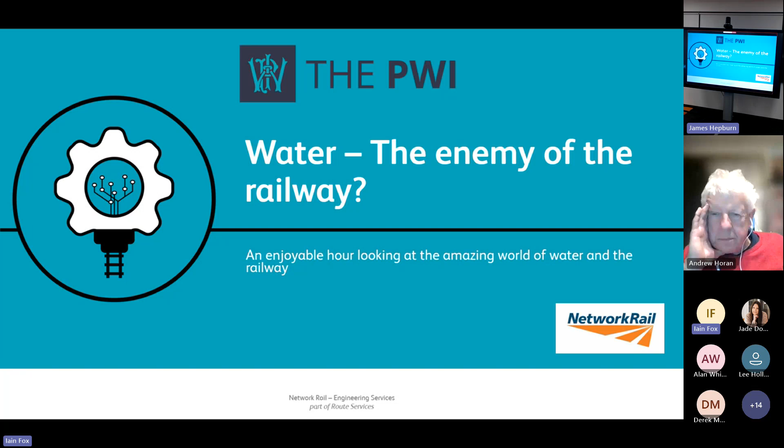I did a very similar talk to this for the ICE just before Christmas. I was asked to come down to see you guys here and give you a very similar presentation, looking at water and how it affects the railway. We know it's very prevalent in the news, we know climate change exists, so how and what is it that we're actually doing?

There is a plan for this evening, believe it or not, so this is it. We're going to have a look at the difference between a drainage engineer and a water engineer - that'll make itself clear in a sec. We'll have a very brief look at Network Rail management process. I don't want to put you all to sleep, so we won't do too much on that. We'll concentrate a little bit on what the issues are, so the main issues of climate change, the main issues of existing and aging infrastructure, and the issue of scour.

Bridges and structures - we'll have a look at what we have within Network Rail to try and fight this water. We do have a water management strategy. We'll have a quick look at hydraulic modelling, and we'll have a little look at catchment analysis as well. And then we'll finish off by having a look at some of the advancements that we are pushing to try and help us manage this problem.

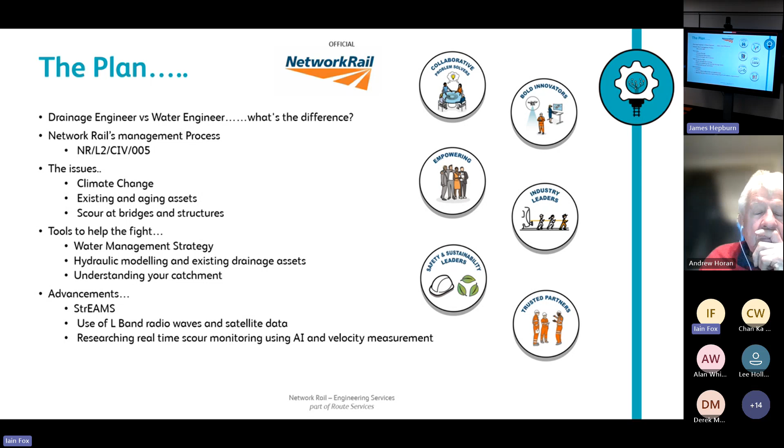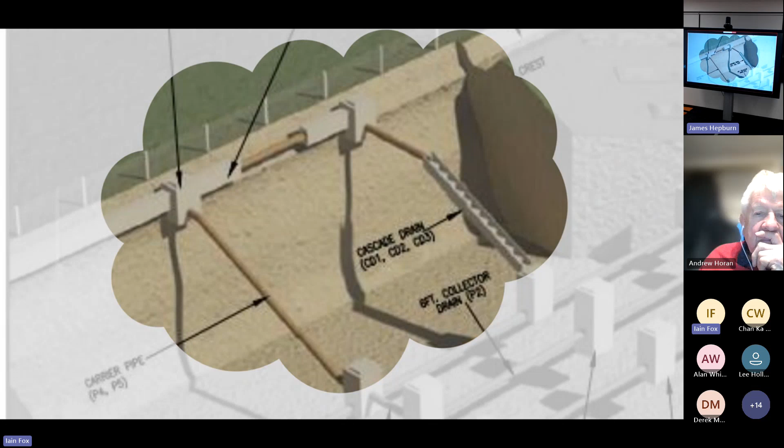So if I start by looking at drainage, and if I say I'm a drainage engineer, it brings up certain connotations in your brain about what my day-to-day job is. Most people think that we deal a little bit with some crest drainage. We have a look at some counterforts, we have a look at the cascades to bring the crest drainage down onto the track drainage, and you pretty much think that is my day-to-day job. That is a drainage engineer's job.

If I go into schools and colleges and ask them the same question, pretty much that's what we get as an answer. If I then open that up and say, okay, forget drainage engineering, I'm actually a water engineer - now what does that tell you that I do? What that tells you is, yes, we deal with track drainage, and we deal with catchment analysis, and we deal with the hydraulic modelling, and we look at third-party inflows, and surface runoff, and flood risk management, and river flooding, and tidal flooding, and scour.

You get the idea, and we also look at some research things. What do you do in the afternoons? The afternoons are just spent sleeping, really. But as a Network Rail drainage engineer, this is actually what we do, and there's a labelling problem between what you think we do and what we actually do.

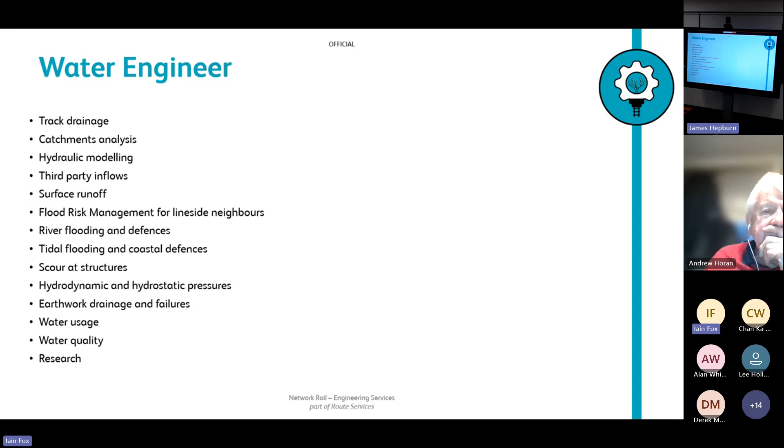Network Rail very kindly gave us this little graphic, which I'll make a bit bigger for you so you can see, kind of demonstrating the water use and problems around the railway. So if we just pick a few of them - yes, we operate drainage assets to take surface water from the railway corridor. How many people know that we actually are responsible for managing water quality off the railway? We can't pass forward contaminated water. We have legal responsibilities around discharge. We manage coastal defences - Network Rail have got several assets that are classed as coastal defences, and those defences don't just manage the railway, those are coastal defences for properties, towns, villages, and beyond.

We use water, obviously, for dust suppression, cleaning trains, things like that in the depots. We dewater tunnels. We use potable water in the stations. We prevent scour. We manage flood risk. All of these things go on to my desk and my day-to-day job as a drainage engineer for Network Rail. Does that come as a surprise to anybody about the scale of what it is that we do, or am I preaching to the converted?

Silence. Brilliant. I love a bit of interaction.

Okay, we'll move on. I think a lot of things have become much more, if you like, the traditional view of the drainage engineer in managing drains. The environmental issues and climate change have made it much more than that in recent times.

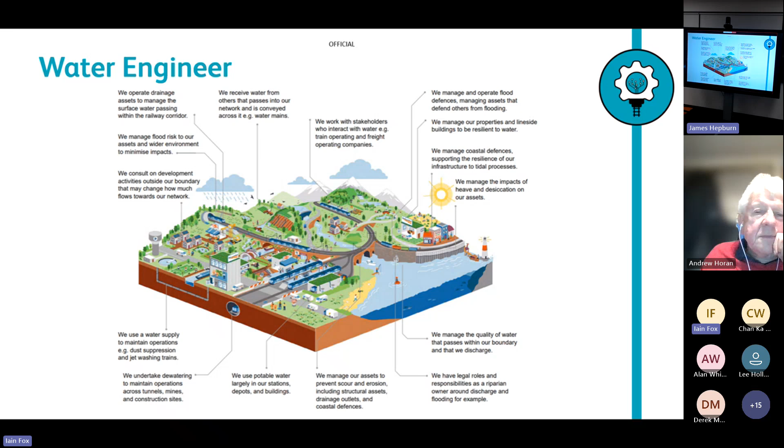And when we come on to look at catchment analysis and problems, we'll touch on climate change to get a bit of an understanding of it. It is getting more difficult to defend our position with coastal assets, protecting the communities. It's not solely for supporting the railway, but that's becoming more and more difficult to defend.

It is, and it's an argument with NRW. It's an argument with the EA here in England, SEPA in Scotland, that all the routes and regions are having about maintaining these flood defences as flood defences and not just as a railway, because there's a huge cost implication in defending or keeping them as flood defences and not just keeping them as a railway.

Because we're not a coastal protection authority, are we? No, but we do manage coastal defences. There are quite a few, actually, quite a lot of them in Wales that don't get into trouble. You've got a few, yeah.

So as Network Rail, yes, we've got a management process. We've got one for everything at the moment. The drainage one happens to be CIV 005.

It looks at all of those things. So it looks at things like how do we evaluate a drainage system? If we know a drainage system is in the ground, how do we evaluate that? How do we describe the assets? How do we look at management plans?

How do we inspect a railway system? How do we maintain it? How do we design it? How do we install it? All of Civil 5 covers all of these things.

The reason, as far as I'm aware, that Network Rail take this stuff very seriously is this.

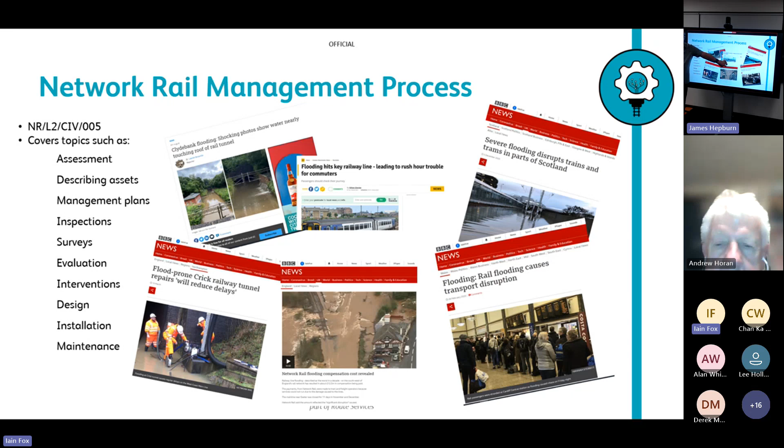Doesn't happen. So this standard tries to prevent these. Whether it works, well, we're working on it.

So climate change is one of the biggest challenges that I think we all understand is happening. It is getting wetter, it's getting warmer, the river levels are getting higher, the velocities in the rivers are getting more.

The amount of water, the volume of water coming down there is huge. If you look at the Environment Agency, Natural Resources Wales and SEPA, they all have estimates on 2050 and 2080 river levels.

And some of those are adding 100% extra flow to what you have now. So if you've got a river, it's going to double under normal conditions by 2080 in some of the predicted models. Wintertime flows, so it's a year-round flood model.

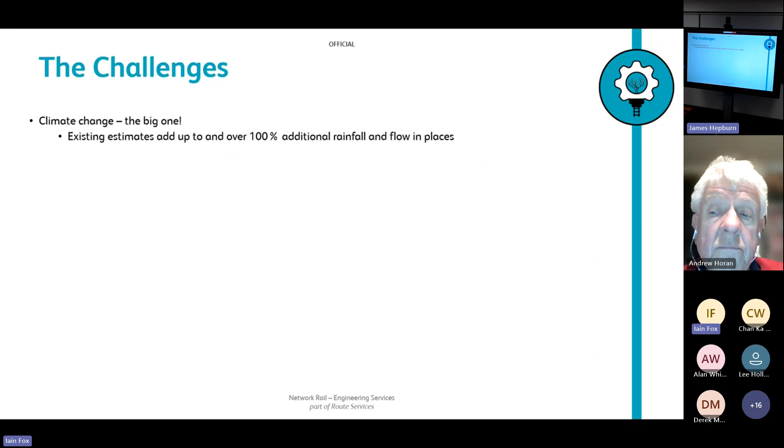Yeah, so the flood is going to get a lot more because the rainfall gets heavier, the catchment drops all that rainfall into the river, and that response is over 100% in some areas. I've seen 124% in one area in Cumbria, which is enormous.

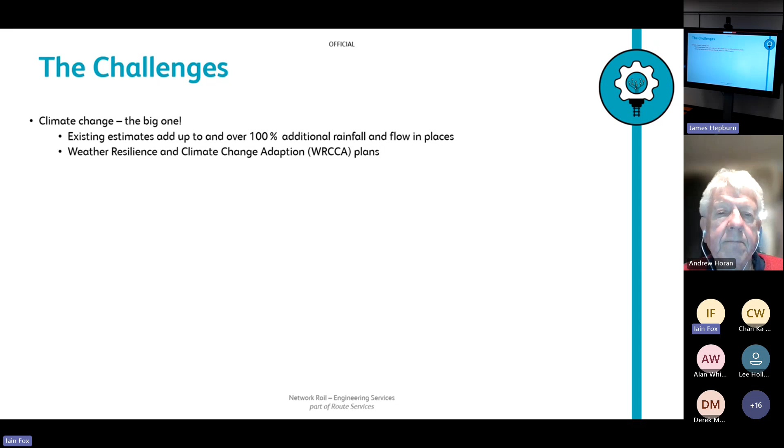Does that take account of 1.5 million new homes before the end of this government? No, doesn't account for those. Again, obviously, one of the use cases is you put more homes on, you get much faster runoff, and it changes the response time of the catchment.

It doesn't change the volume of water, it changes the response time of the catchment, so the water gets to you faster than it does now.

What I call flash flooding. Flooding risk, absolutely. Dry ground that doesn't infiltrate water perches on top before it gets a chance to infiltrate into the ground. So you've already got increased water, and with saturated ground it does exactly the same thing - the water's got nowhere to go. This is Wales, the ground is saturated all the time, so as soon as it's saturated, water just goes straight off the top.

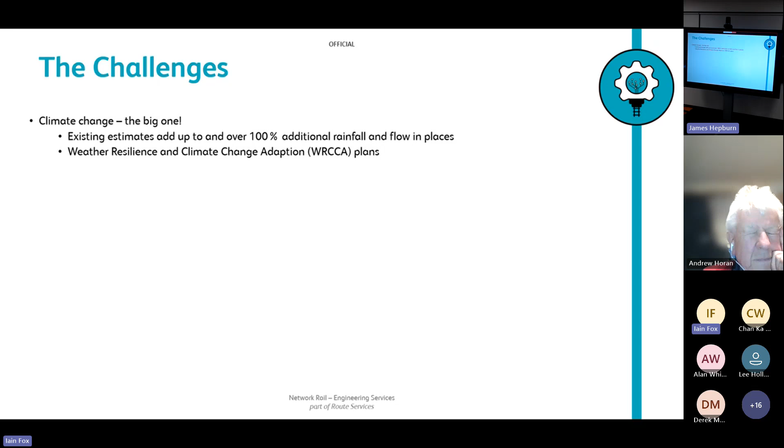As Network Rail, we do have a weather resilience climate change adaptation strategy. If anybody is bored enough, feel free to scan that QR code and it will download the entire plan to your mobile device. It's a brilliant document to get you to sleep at night - there's a lot of it. I'll come onto that in a second. The next slide has some key points from it, so I won't make you read it all.

Here's an interesting stat. When we're looking at climate change, I know we're talking about flooding, but just have a look at this one - heat plays a part too. During July 2022 there was a big heat wave in England, and it reduced train performance by about 40%. The way it does that is a lot of these power supply buildings overheat, the transformers overheat - they're a big tin shed, and when the sun beats on them, things just pop. If you don't get air conditioning units inside those PSPs, things will go pop. We couldn't get enough in, and in July '22 we dropped performance by 40%, which in one week caused a £30 million loss of revenue for the railway system.

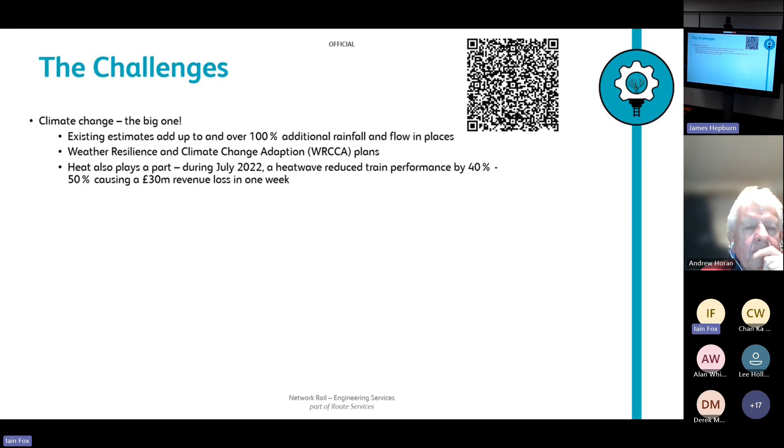That's a lot of money, an awful lot of money for heat. Can you imagine what flooding is? Big numbers.

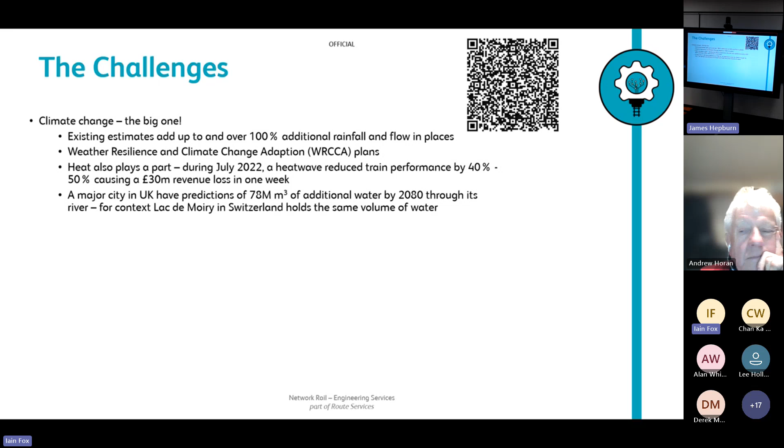This is an interesting one - I'm not telling you where, but there's a major city in the UK that predicts one of its rivers is going to have about 78 million cubic metres of water additional to now by 2080. For context, a 1.5 mile long, 120 metre deep lake holds 78 million cubic metres of water. That's additional to what that city gets now by 2080.

Where is that water going to go? How do we deal with that? I haven't got the answer, by the way - I haven't got a clue. That is an awful lot of water for one city in one part of the UK, by 2080, if the predictions go the way they're going. It's an awful lot of water.

There's a calculation done that if you look at Ullswater in the Lake District, which is about 8.5 miles long, it would have to be about 10 metres deeper than it is now to accommodate that water. A vast amount of water - difficult to picture.

Yes, we've got lots of aging assets and infrastructure - around 90% are as they were when installed about 20 years ago. Some structures Brunel built, from the 1800s to the 1850s, 1860s - a lot of structures are actually more than 150, 200 years old. They weren't designed for the amount of water coming down the channel now, let alone in 20, 30, 40, 50 years' time. How do we solve that problem?

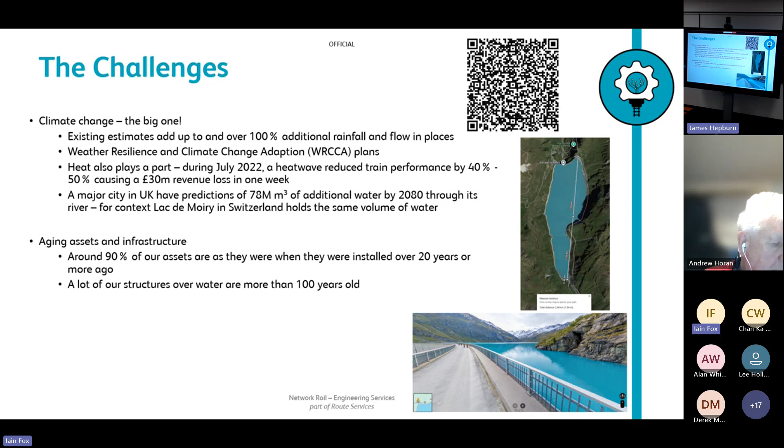And drainage assets - most of the drainage on the railway was probably installed 10, 20 years ago, and some would argue it hasn't been touched since we put it in the ground. However, if you do a hydraulic model now based on drainage that was put in the ground 10 years ago, it will fail - it hasn't got the right diameter to take the additional flow. As we were talking earlier about housing estates, that's where this comes in. If you've got houses built around the railway - people build either around a railway or around a river, that's where people build - all of that runoff gets to the drainage system a lot faster than it used to, which causes your pipes to be full, which causes surcharge at the top, which causes flooding on the track.

Quick look at scour. Scour is the largest single cause of structure failure. For those who don't know, scour is the action of removing riverbed material due to water action, hydraulic action - erosion, essentially.

Cost to Network Rail is around 100 million per control period. That number is from the technical authority, not from my brain. And again, it's an increase in risk. As we say, it's not the river level that causes scour, it's the energy within that water.

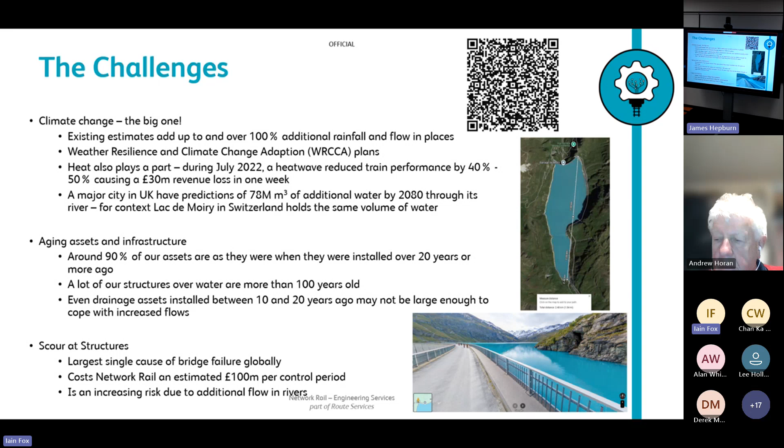As the water increases, naturally it gets faster and faster. So it is a huge problem. We'll look at scour in a second.

This is the climate adaptation snapshot. So as Network Rail, we own about 20,000 miles of track, about 30,000 bridges, tunnels, and viaducts, countless numbers of signals and level crossings, and we manage 20 of the UK's largest stations.

The Schedule 8 cost, for those who don't know, is what we pay to the train operating companies if we close the line unexpectedly. So when you're on a train and you get delayed, and you rub your hands together because you can get your delay repay, that comes from us. So please don't claim it anymore, please.

But some of these numbers are from 2016. Wind has cost us 382 million since 2016. Flooding has cost us 316 million, and earthwork failures 144 million, just in Schedule 8 costs. Not remediating the problem, not fixing it, not doing anything else - that's just what we pay out to the train operating companies.

You can look at that one on your own time. This one's interesting - this is the investment that Network Rail are putting in CP7, which is what we're in now. Earthworks and drainage account for about 1.8 billion of investment in CP7. That's how serious Network Rail are taking water management, flooding, scour, etc.

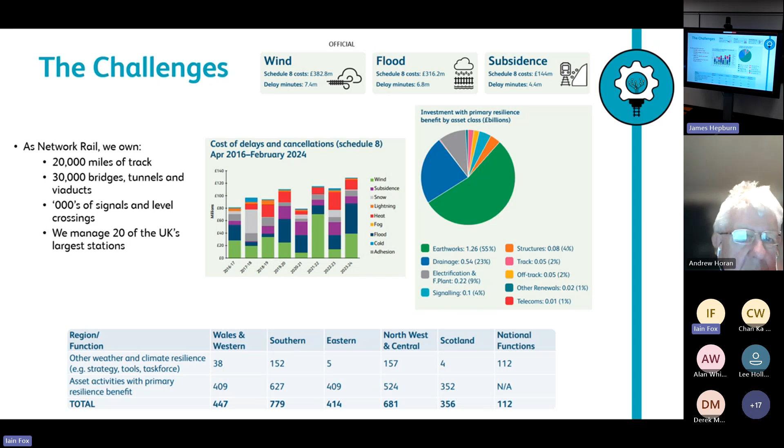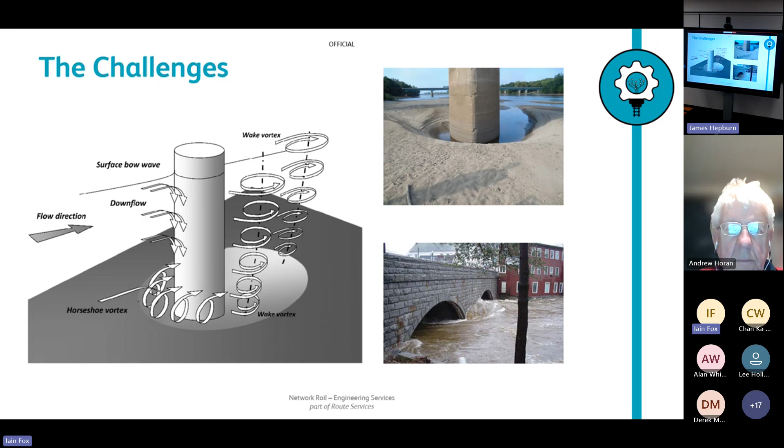Introducing... Oh, yes, there we go. Try and pause it a second.

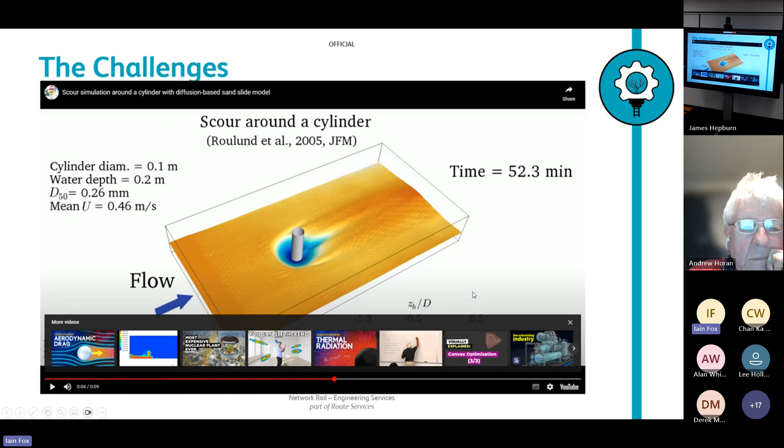You've also got constriction scour, very similar to your hose pipe at home. You turn the tap on, you're watering the plants, the kids or grandkids come into the garden, it's the law that you squirt them with the hose pipe. What do you do? You put your finger over the end, don't you? You don't turn the tap up anymore, you put your finger over the end and you squirt.

Q equals VA, so flow rate equals velocity times area. You reduce the area, the velocity has to increase to keep that formula constant. That's exactly what this is doing.

We're narrowing the riverbed, granted only by a small margin this one. We can imagine where we've got a big viaduct, maybe 2 metre wide, 3 metre wide abutments up here. It's a huge construction, so yeah, I'll skip forward on that.

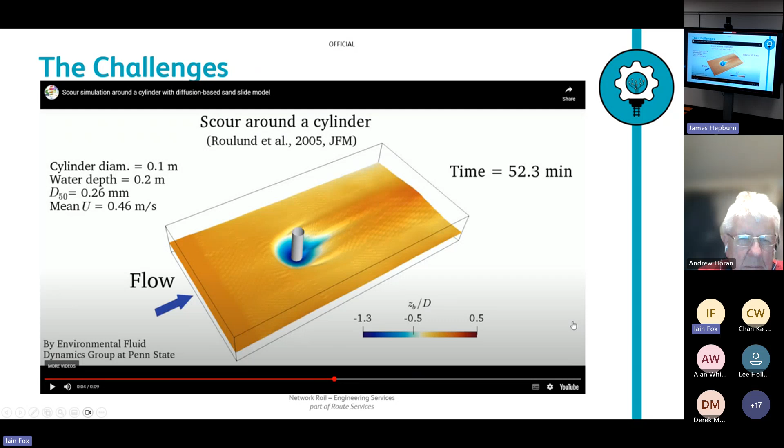No, I'll skip forward. There we go. So what have we got to help the fight? Network Rail do have, as we said, the water management strategy, and I'm going to let her explain.

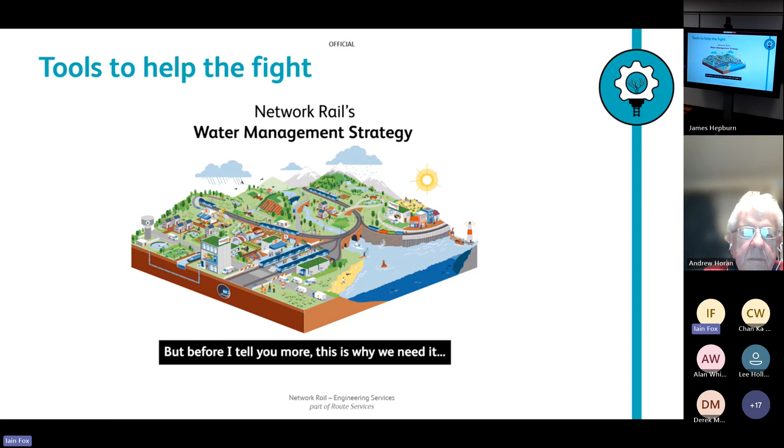Introducing Network Rail's water management strategy. This strategy is going to change our approach to water management. But before I tell you more, this is why we need it. Climate change is happening now, making the consequences of extreme and adverse weather a reality for all of us. Flooding and droughts already cost Network Rail millions of pounds a year and are only likely to get worse. From landslips to electrical failures, weather-related incidents affect the safety and performance of the railway, resulting in penalties, delays, poor environmental impacts and a disrupted service for our passengers.

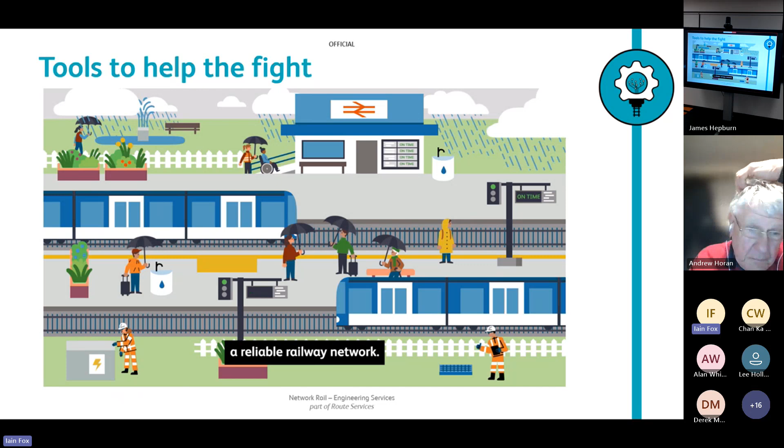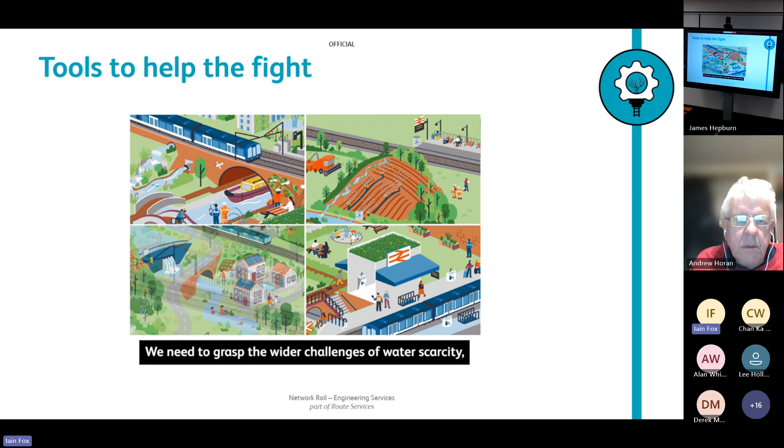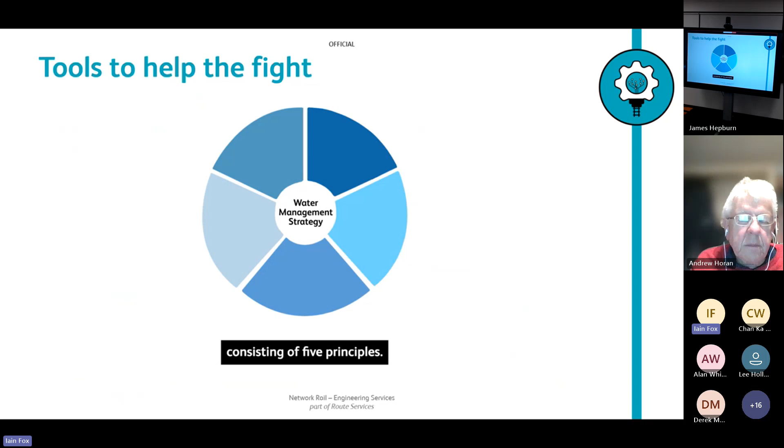But we can improve. Network Rail is committed to running a reliable railway network. To do this in today's world, we need to prioritise water management. This means dealing with the water that affects all of our railway assets. We need to grasp the wider challenges of water scarcity, polluted water, and the potential benefits of excess water, in collaboration with our neighbours. We've developed the water management strategy consisting of 5 principles.

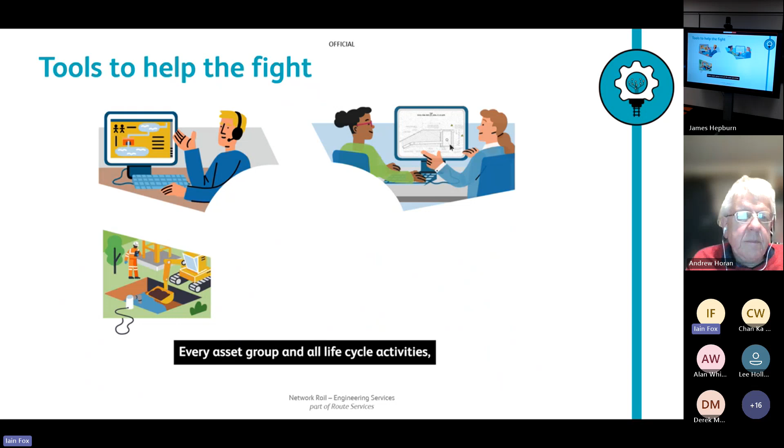These are: take a holistic view, be resilient, use less and recycle, keep it clean, and unlock wider benefits. We are the first in the transport industry to develop a water management strategy. It's an opportunity to demonstrate our proactive, leading approach. As the 4th largest landowner in the UK, we can make a profound impact. Water affects all of us on the railway, every asset group and all life cycle activities, including inspection, maintenance, design, construction and asset management. We all have a responsibility and we need to start today.

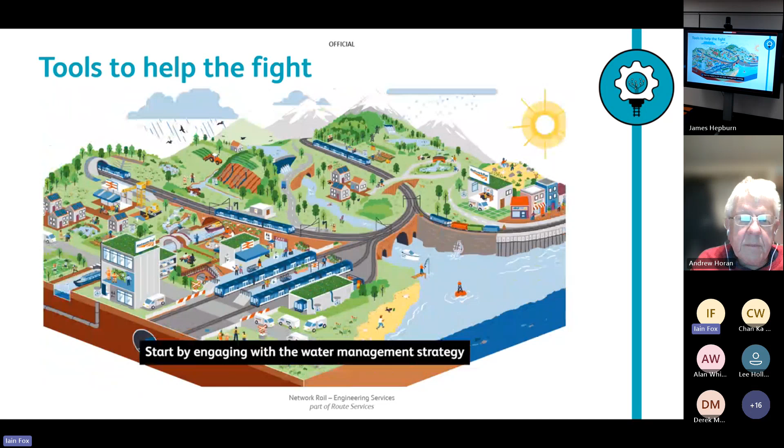So how do you make a difference? Start by engaging with the water management strategy. Go to the My Connect page for more information.

So, water management strategy on a page. As I said, there's 5 key principles. Take a holistic view - that is one thing Network Rail has been terrible at over the past 20 years. What I mean by that is we've looked at our drainage system and haven't looked anywhere else. Most Network Rail drainage systems have inflows, third-party assets coming in, surface water coming down, surface runoff, fields surrounding the railway that transport water down. For 20 years we've ignored that, we've just gone, no, our pipe is here and it works perfectly, it doesn't have inflows. So that holistic view is having a look at those wider areas, those wider catchments.

Be resilient. Be prepared for too much water. So do we now design with today's flows in mind? No, what we now do is add climate change allowances on and design for those flows.

Be prepared for too little water. Doesn't affect the drainage side really, but certainly if you're using water in a DU or a train depot, you need to try and think about, try and use less and recycle, which is the next one. Can we actually capture that water? Can we capture rainwater to flush toilets, for example, in stations, which is happening now? Can we recapture other types of water? Can we reuse it? I don't know, possibly.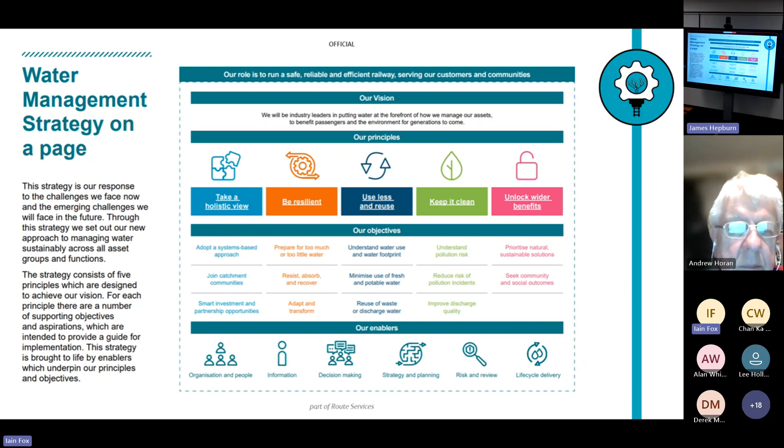All of those should then go to unlock the wider benefits. If we can start to save water, use it more responsibly, it should mean there's actually less water in the system going round in circles and increasing with climate change, and actually relieving stress a little bit on our assets.

It's not just me saying it, Andrew says it as well. Water management is the most underrated discipline, or has been certainly for the last 20, 25 years. I think it's no secret that any scheme, any renewal, when it gets tight on time or budget, drainage was always the first thing that was pulled out. It's the thing underground, nobody sees it, nobody cares about it till it goes wrong. That was the mindset. Thankfully, that is changing now a little bit. We're not quite there yet.

And Mona, who's our technical lead for drainage in the technical authority, says water goes beyond drainage. So that comes back to my very first point of, is it a drainage engineer or am I a water engineer? I think the name is irrelevant. I think the job that you do is the relevant part. What I'm called doesn't really matter.

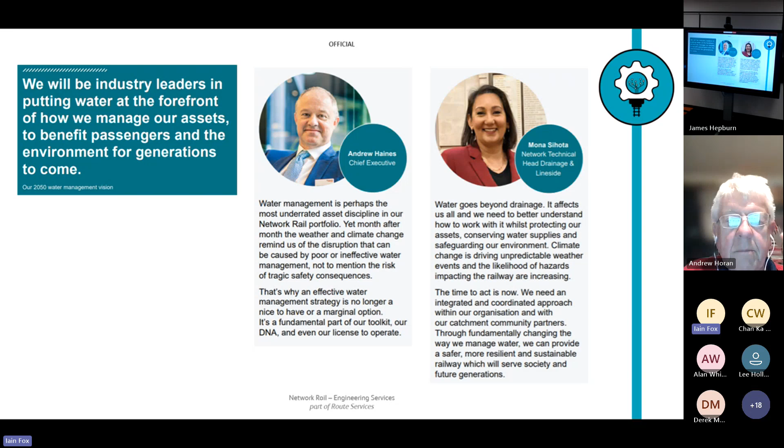Again, you can read those, they are in the water management strategy. So how then? We've talked a little bit about catchments, and we've talked a little bit about how that water interacts with us, how that gets there, and I'm going to let her explain again.

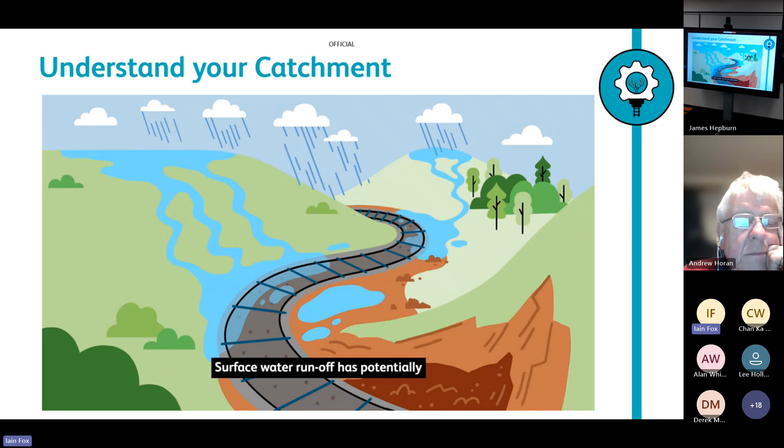Surface water runoff has potentially devastating consequences to the railway. At Network Rail, we need to manage this threat across our infrastructure to ensure we operate a safe and reliable service. This is why dependable data is so important. It helps us to make the right decisions to protect passengers.

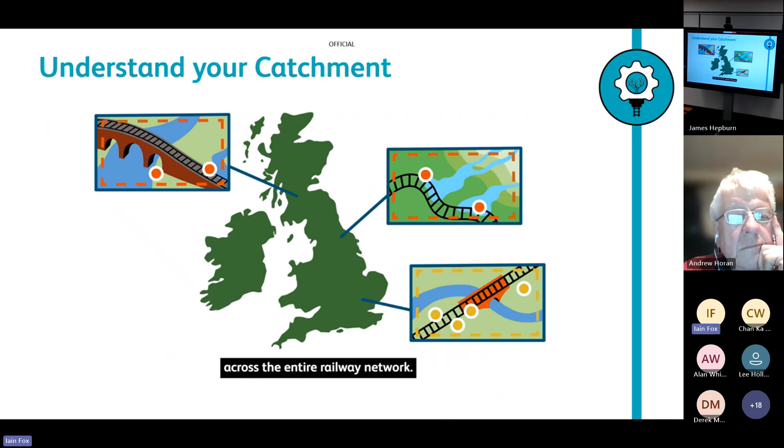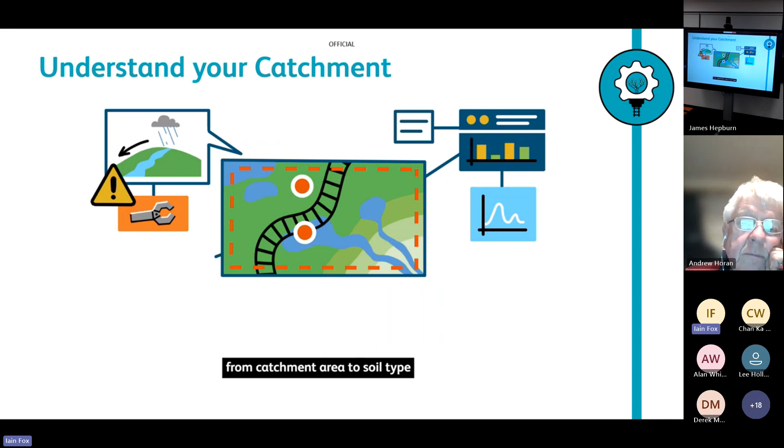Now, for the first time ever, we have a data set that maps rainfall catchments across the entire railway network. It's taken more than a year to produce and encompasses more than 100,000 individual catchments, taking into account various catchment characteristics, from catchment area to soil type, in order to understand potential surface water runoff.

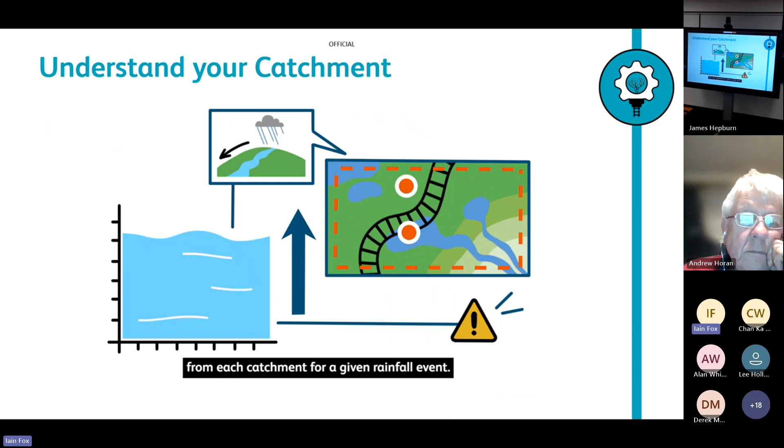This dataset can provide the likely amount of surface water runoff flowing towards the railway from each catchment for a given rainfall event. It relies upon the Flood Estimation Handbook, an industry-standard statistical model developed to understand surface water runoff peak flows from UK catchments. While the methodologies used aren't new in themselves, this is the first time we've been able to access this information for the national rail network at the touch of a button.

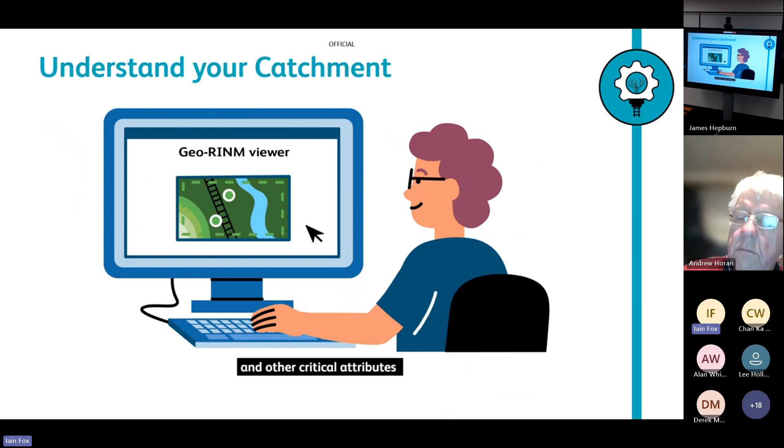The dataset is available as a map layer in Geo-RINM Viewer. A water threat index derived from the Flood Estimation Handbook model and other critical attributes such as crop cover and catchment slope provides a colour-coded ranking for each catchment. At a glance, the user can understand the catchments that potentially pose a surface water threat to railway infrastructure.

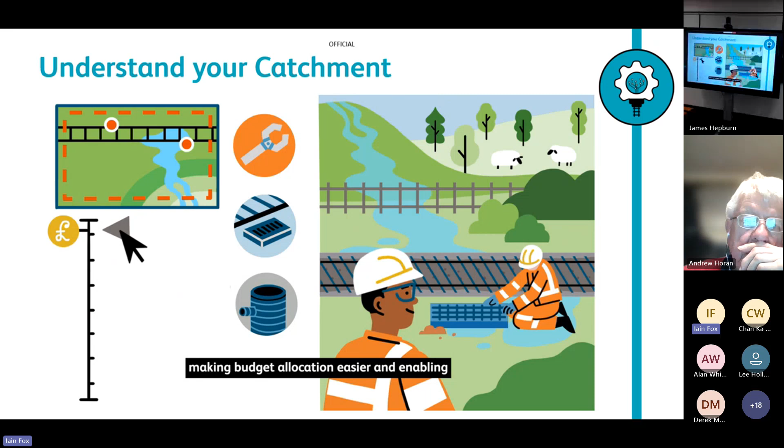This helps asset engineers swiftly decide which assets need improvement first and where to install new drainage systems, making budget allocation easier and enabling rapid comparative assessments of which catchments are potentially more troublesome. Now it's possible to view a section of track online and contrast the relative hazard posed by adjacent catchments and how these compare with other catchments across the network.

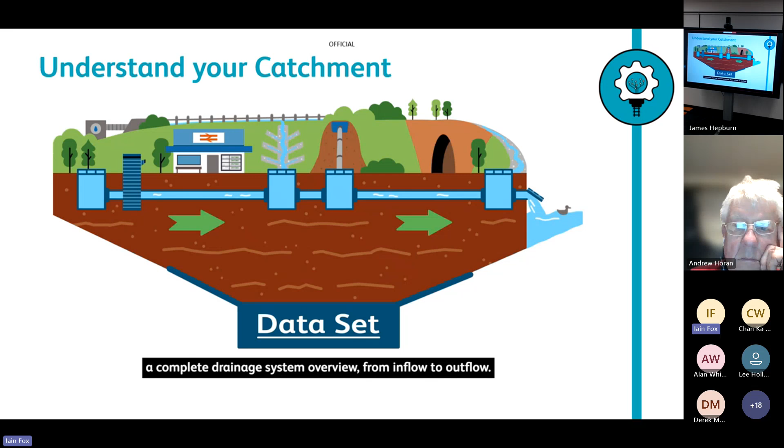The dataset also provides a great starting point for more advanced analysis, assisting asset management teams and designers in making informed decisions and facilitating good engineering judgment when developing new capital schemes. In addition, the dataset is also being used to build new asset management tools currently under development, such as the StrEAMS tool. When used in conjunction with programs such as this, the dataset has the potential to help provide a complete drainage system overview from inflow to outflow. This allows engineers to understand the current and future ability of drainage systems to protect the railway in the years ahead.

So much better than I could explain. There's a couple of key words there, and it was potentially can do all of this thing. It's very much a starting point for a greater look at catchment. Catchment analysis has its own degree course, that's how complex it is to try and work out where the water comes from and where it goes to.

This is a very, very quick, light touch version and is designed for the routes to be able to try and prioritise or get greater understanding of how the water works, and then pass it on to the hydrologists and the hydraulic modellers to actually quantify that risk. But it is something that we've never had in Network Rail before, and it has got the potential to be very, very powerful at a quick glance to try and prioritise things.

I'll have a quick touch on some hydraulic modelling. I guess most of you understand or know what hydraulic modelling is.

There's two types. We've got drainage hydraulic modelling, which you can see in the top corner, where we build a 3D version of the drainage system we're installing. We've got the gradients, pipe sizes, catch pits, everything, and we can drop rainfall on that and see how that system responds. Is it big enough? Has it got the right slopes? Is the outfall sufficient? We can test varying degrees of rainfall, surcharge, flooding, all sorts of things. We can stress test it.

We can build it for existing systems and stress test the existing system. There's a project near London at the moment where we're trying to map about 3 miles worth of drainage so that we can model those systems and see how they respond. Is there blockages, is there damage, is it just not big enough, or is it fine?

We can also look at things like river modelling, which we use for scour. This is a free piece of software called HEC-RAS, developed by the American military. It's regularly updated and will always be free, thanks to the US government.

It's a backwater effect model. What I mean by that is you need more cross sections after your structure than you do before your structure, despite the fact that you're trying to work out what the water's doing before your structure and not afterwards. I think that was sufficiently confusing.

What it means is the things downstream have a greater effect on your structure than the water approaching it. The water approaching your structure is quite easy to guess or predict. What happens after the structure, people generally forget about. But if you think about how a weir works - we put a weir in the river, it will deepen the water - what you actually get is from the top of that weir a flat water surface right the way back to wherever the river gradient is. That's called the backwater effect.

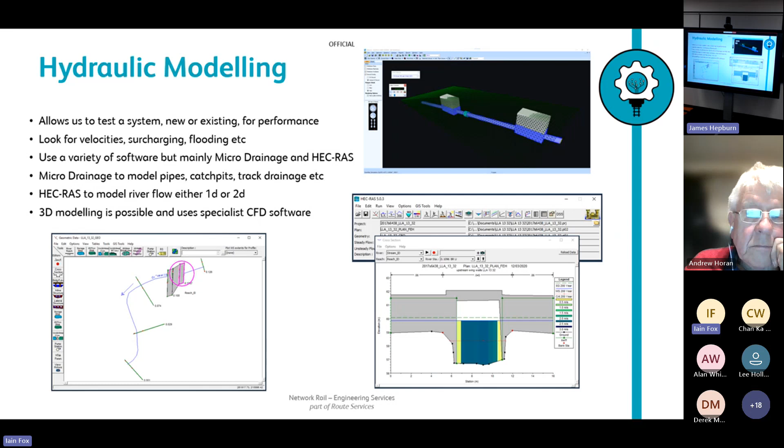You heard in the video about streams. I just thought I'd quickly touch on streams. This is a drainage and insight tool that it's what we should have had 10 years ago. What I mean by that is it's a one-stop shop for everything to do with your drainage.

It's got your catchment details in, it's got things like your workbank management tooling, it's got all of the historic data in, it's got catchment stuff in, it's got rainfall data in, it's got all sorts of stuff that allows you to sit and look at one program and see what's going on without having to have 10 different logins for 10 different systems, as we've always had. And it tries to bring them all together.

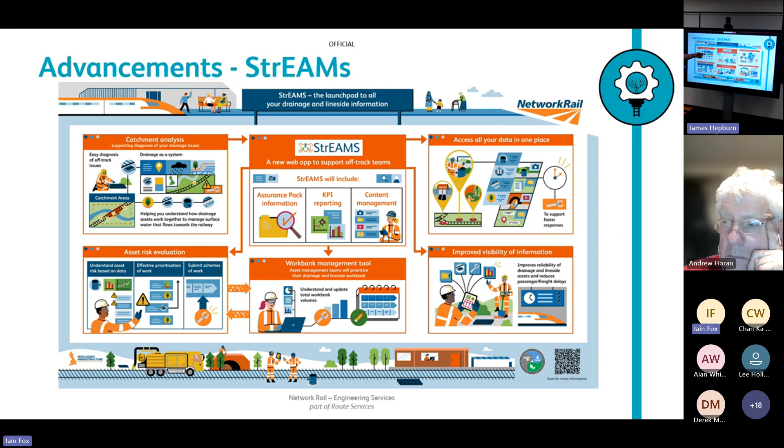Mona is very, very passionate about this and pushing this to the routes. It does all of your KPI reporting and everything. It's a very, very good tool. The catchment part of it is a starting point, but it's in there as well to try and help you understand what's going on in your area.

Right, bear with me on this, this could get a bit dry. We're looking at using L-band radio waves. L-band is a long wave radio wave. There are currently 2 satellites above us, at opposite poles of the Earth. They rotate around the Earth as the Earth spins. Very similar to Radio 4, which I'm sure you're all familiar with - you can still listen to Radio 4 sat in your living room. Those radio waves penetrate your walls and get into your house, and you can hear it.

Brilliant. These L-band radio waves penetrate the Earth to a depth of about 3 meters. The response that the satellite receives from that signal tells you how saturated the ground is, because you get a different wave pattern coming back if it's dry ground compared to if you have moisture present.

What you actually end up with is a very noisy section of the railway corridor. Green is good, yellow's okay, red means there is water there. Now you could be looking at wet beds, you could be looking at broken drainage, you could be looking at an aquifer, you could be looking at all sorts of things.

We process the data, well, we don't process the data, Asterra do. The data is processed to give you a bit more of a heat map, and then it's processed again to actually tell you where your problems are in terms of groundwater.

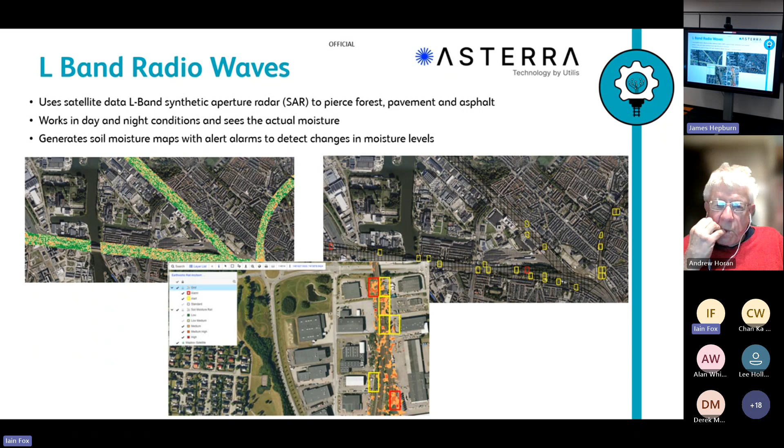It's interesting because we already use soil moisture deficit to predict track geometry. This sounds like another step up in providing that kind of information.

I'm just conscious of the time because it's already 6 o'clock. This is something I'm currently working on with Western Route, looking at real-time scour monitoring using bits of artificial intelligence. The actual clever bit isn't me - the clever bit is the camera that sits and looks at these assets.

It uses a difference model - it looks at the picture it took last compared to the picture it took now and tells you the differences. It'll tell you whether there's deposition of the bed, whether bed levels have increased or decreased, whether the structure has moved, or whether a badger walked in front of it. It'll tell you all sorts of things you ask it for. The clever part is it knows what a badger is and won't alert us because we don't care - it will alert us if the structure moves.

So we've got the camera looking at above water level and the structure itself. We've got some flow sensors using ultrasonics, mounted in the river itself, looking at real-time velocity. So we're moving away from the predicted hydraulic model and actually measuring real-time velocities in the river and at the bed.

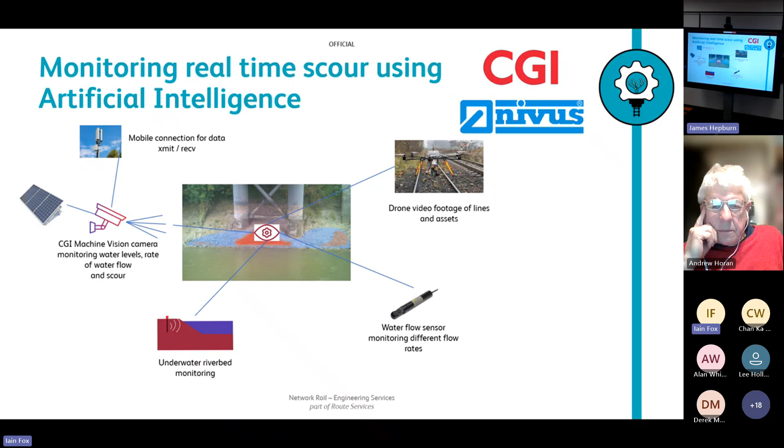And you'll be pleased to know that that is about me. We've got a little bit over. So we covered drainage versus water engineer part. We looked at CIV/005, a bit of climate change, aging infrastructure, scour, some of the tools and some of the advancements. Thank you very much for listening.

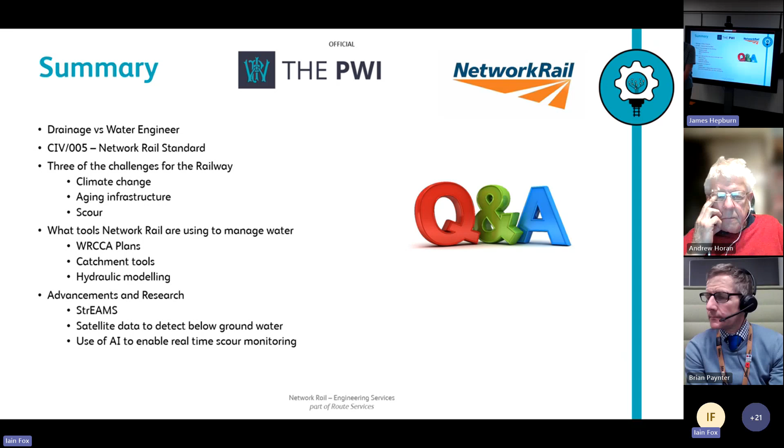The new drainage is obviously very simple to spot. It's the historic drainage where you've got hidden catch pits, so you do not know it's there till you start digging. By the time those guys put the spade in the ground and start digging, it's designed, it's built, it's manufactured, it's on site ready for installing. They're going to install it whether they find a pipe there or not.

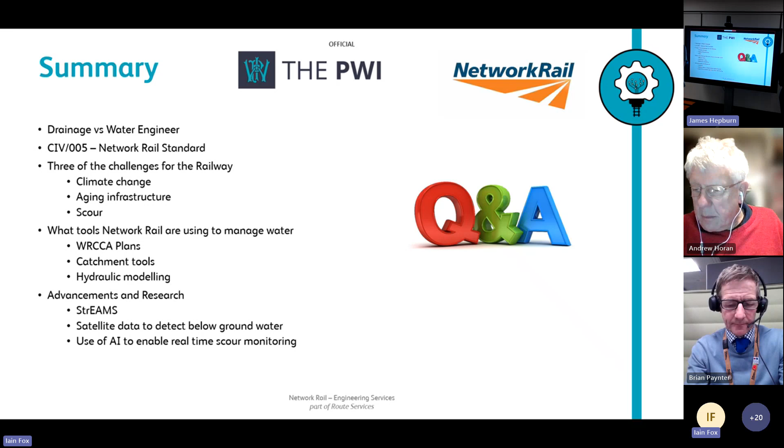We were discussing before the meeting, and it started quite innocuously talking about bits of track in Swansea. But where you have railways in cuttings, historically, the engineer would have designed a grip drain at the top of the cutting to intercept water from the neighbouring farmer, discharge that one way, and might then have installed a drain in the track. One of your earliest diagrams is looking at exactly that.

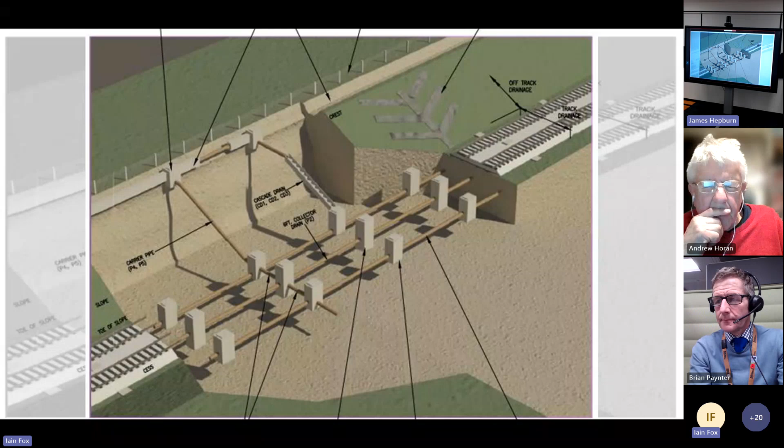And really the question is, what's the preference today? Because a drain at boundary level is incredibly difficult to maintain. Absolutely, the railway where we don't care about the trees growing. We certainly don't mow the grass, as we did when those initial railways were designed. So that's the answer - it is in some cases, it's not in others.

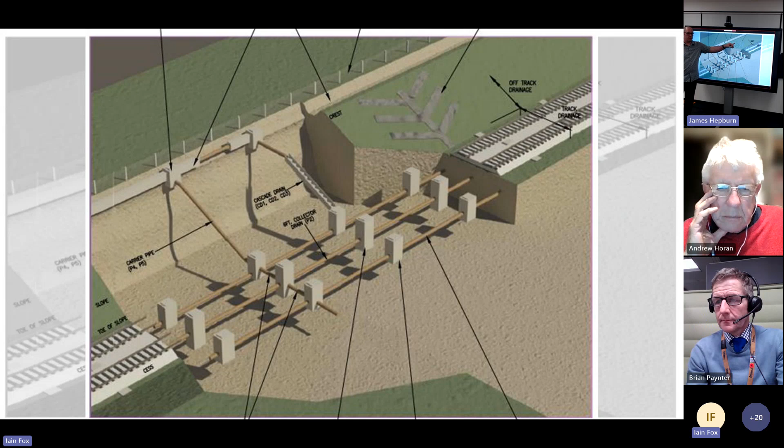It depends on how that water flows. If you've got a general gradient coming towards the railway, and then a cutting as we have here, then a crest drain, or crest ditch probably now, is the better way - it captures more water and is probably the preferred option. However, if you've got a single river or watercourse coming in that floods and expands, then you might use a formal head wall to catch that water as it comes down, and build walls that direct the water to that head wall, because you know it's floodable, a single point watercourse.

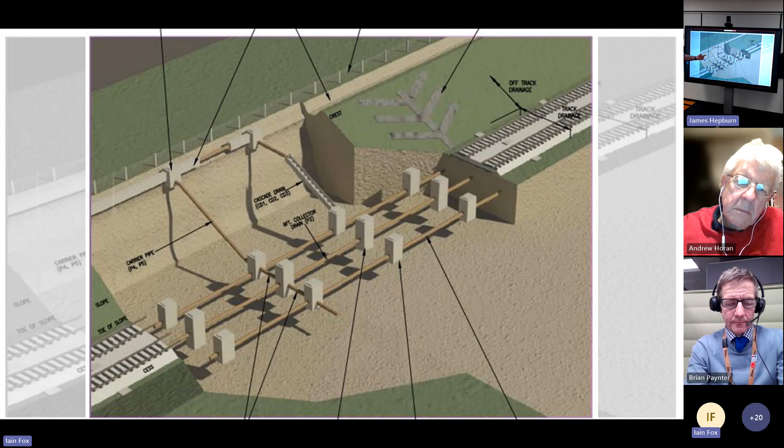You get springs coming through as water soaks into the ground - spring lines, where counterfort drains come in on the slope. They're installed more and more nowadays. They've got a reach of about 5 metres either side, so if you put one here, you'll put another probably 10 metres away, and it will quite dry that slope. The difficulty is trying to connect these into your track drainage. And as with all drainage everywhere, your outfall is key - if your outfall is not big enough, it doesn't matter what you do up here, it's going to flood.

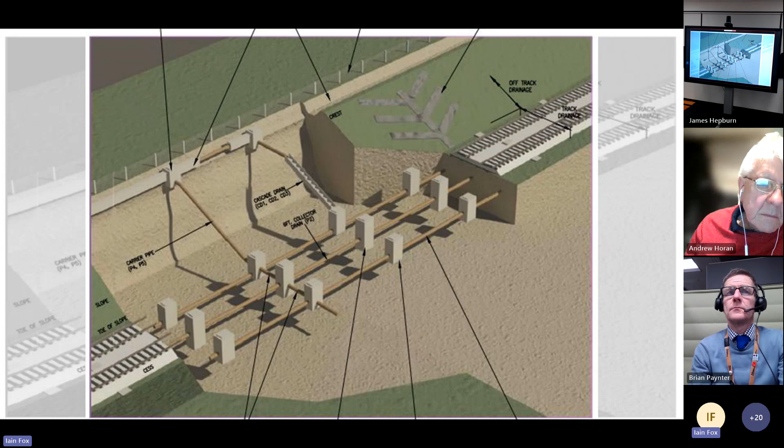Thank you. With regards to the scour, is there anything that you look to put in to reduce it, or is it all about just monitoring it?

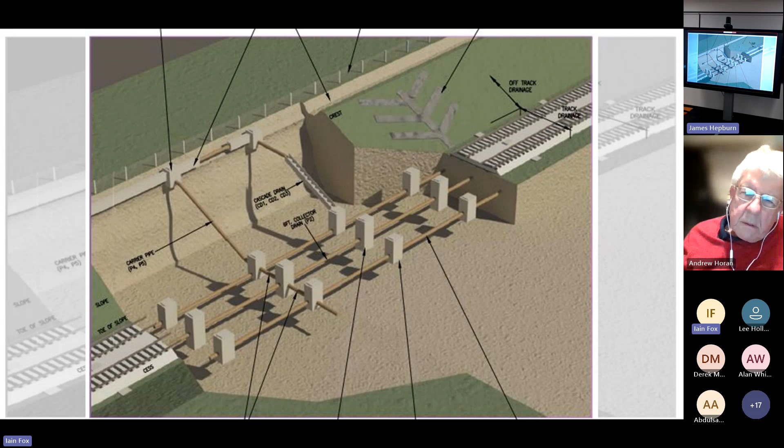There's lots of things you can do to make it go away. You can use rock armour, concrete mattresses, all sorts of things. We're being pushed more and more by the consent authority to do softer engineering approaches and only protect the element that is at risk. So if you've got a multi-span structure and your modelling shows that Pier 1 is at high risk of scour and others are medium risk, you'd only be allowed to protect that single element. You wouldn't blanket protect the whole structure. That's where the CFD modelling comes in, because you can put that protection into the CFD model and see what the effects are.

It might be that you've protected this with, let's say, sheet piles around it, and that might actually transfer the risk because of the change in flow dynamics. You might have caused a problem downstream to a riverbank, or to our structure, or a highway structure further down or further back.

So yes, there's things you can do to prevent it. There's softer engineering, so you could use things like frond matting. Kevin's used frond matting. Best way to describe a frond mat - it looks like scaffold tubes that are weighted with torn up Sainsbury's carry bags that look like lilies. It's the best description I can get. I promise if I put a picture up, you'd go, oh yeah, I see what you mean.

What that does is try to replicate natural vegetation within the watercourse. You're trying to slow the water down because when scour's happening, you've got muddy water with sediment suspended in it because of the energy. If you slow that water down, the sediment becomes too heavy and drops. So that's a real soft engineering way to slow the water down and drop the sediment out before it leaves your bridge area. Or you try to capture the sediment coming in, because it's a bit of a conveyor belt during a flood - it's not just happening out of structures. So you catch that and try to drop it in and infill your own scour. There's a myriad of things you can do to try and combat it.

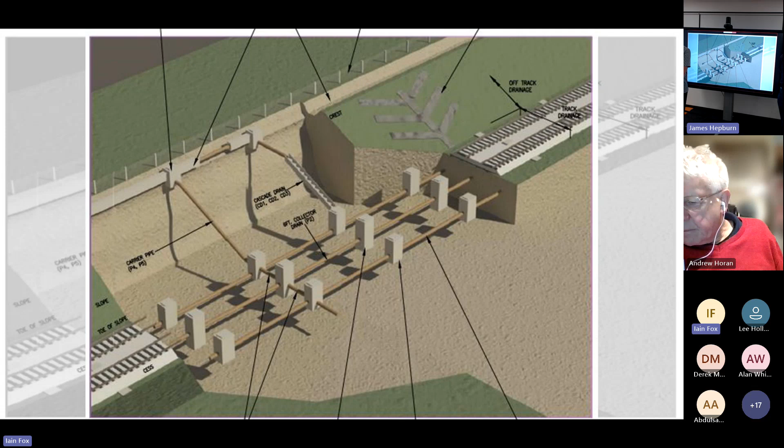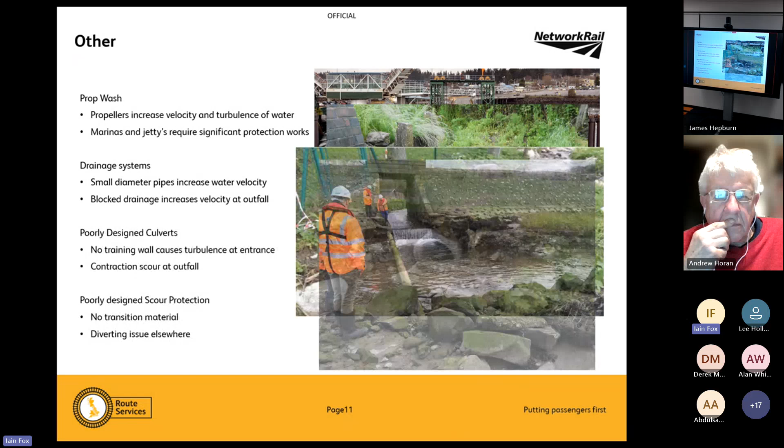Just trying to find you some. Here's one I prepared earlier - this is one of my scour presentations. So bear with me. Let's not talk about them, let's just skip on. Sure, in here somewhere I have... here we go.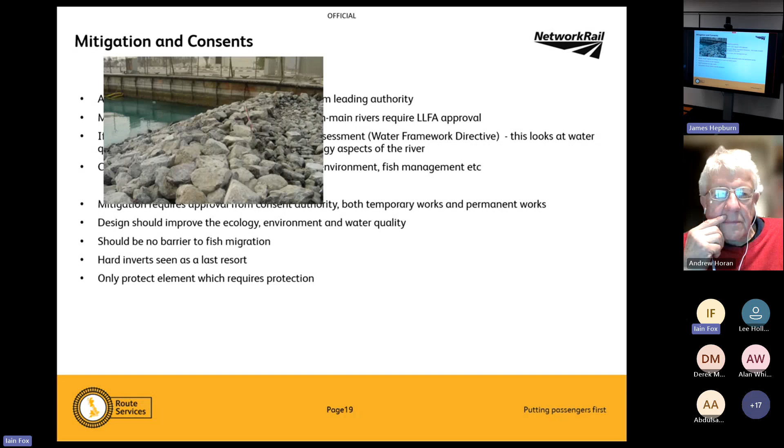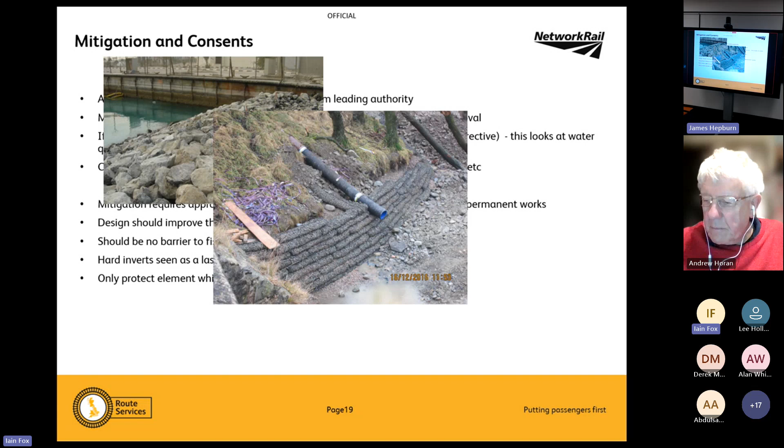So things you can use: rock armour. We've all seen rock armour to protect from scour. You can use rock rolls. The way rock armour is designed is you work out the velocity in the watercourse, and you work out what's called the Shields value - Shields equations - which is the amount of energy required to lift a particle out of the way. You make sure your block is bigger than that, so it's not going to move during that flood event. The rock rolls are not sized like that at all - they're just small gauge rings, basically, and very small materials. So if they get damaged by a bit of debris coming down, they're no good. So please don't use them. This is a concrete mattress.

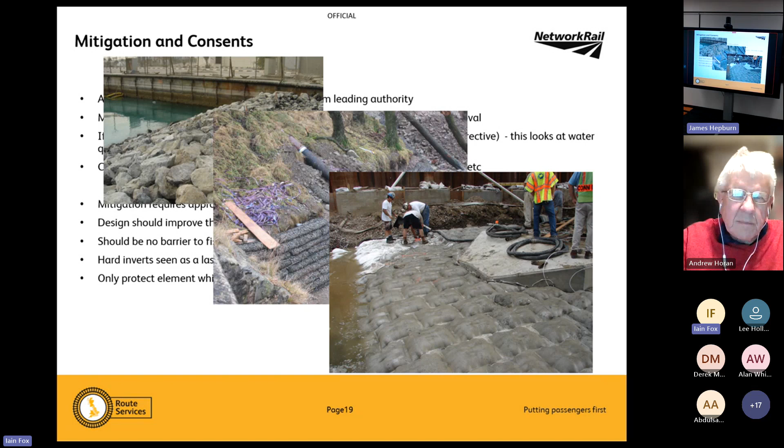It's a big Hessian sack that's stitched around your structure, and one end is plugged into a concrete pump. It fills with concrete, it sets, and becomes a very solid structure. It looks like a mattress rather than a flat surface because you want that turbulent flow - you want to slow the water down. If it's got a flat, smooth surface, the Manning's value is so small that the water just skims across it.

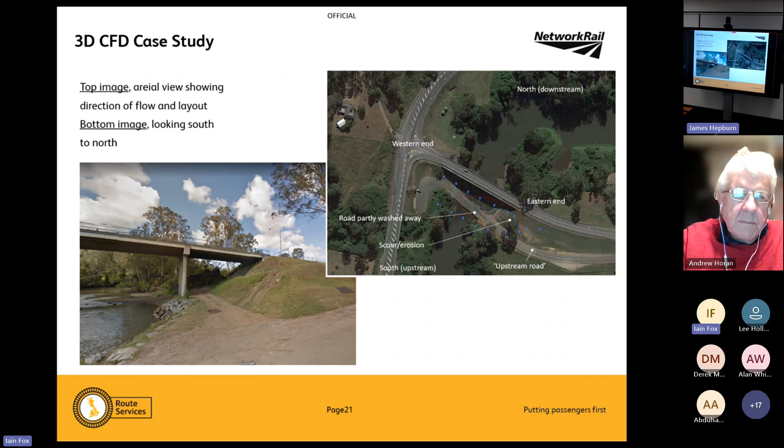I'll show you what that looks like in a second. So when you've got a flat surface, the water skims across it. I wonder if I've got the picture... I have a picture of Mill River. Do I have it? Bear with me. Oh, there we go.

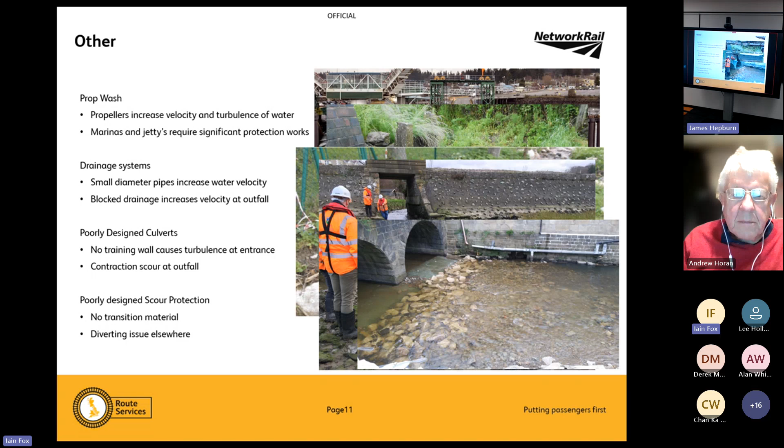But yeah, there's a few different things you can do to combat scour. If you're really bored and want scour presentations, let me know - come back to that. Be careful what you wish for. Okay, does that answer your question? Yeah, okay, any other questions?

Any other questions? Any more online, James?

Alan Whiston just mentioned, in connection with Brian's earlier question, that we also need to consider troughing, especially raised troughing for high voltage, as it's often installed in the drainage ditches - it's the only easy location between the toe of the earthworks shoulder. Constrained areas with lots of assets fighting for the same space. Absolutely, and what you'll find is the cable troughs make great drains as well - they fill with water and transfer it brilliantly.

Not that we don't tell them anything, but yeah, they're great drains. The word used there is 'holistic approach.' Absolutely, yes, we'll use anything to move water around the railway. It's fine. Good. Right, any more questions? Stunned silence - that's what I like.